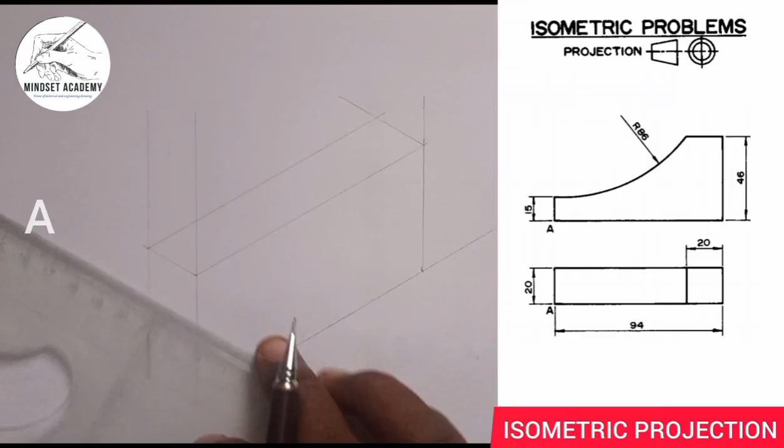You're welcome to my channel, Mindset Academy, where we want to reproduce the two views that are displayed at the right hand side of the screen in isometric projection.

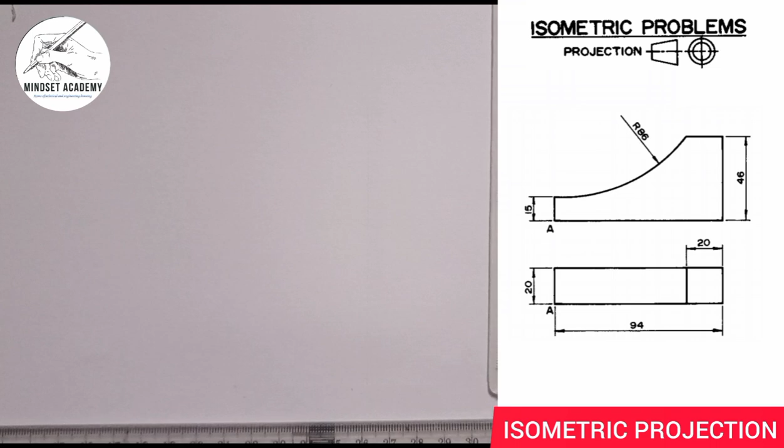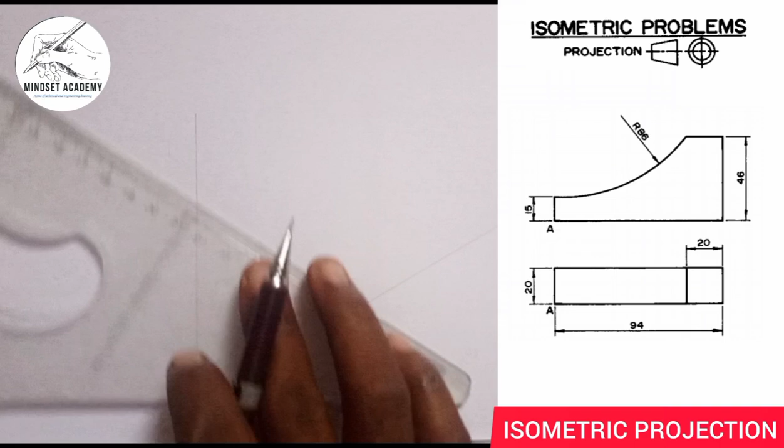When you hear the word isometric projection, the first thing you have to do is draw your isometric axis. That is, you draw the vertical axis this way, and you draw the x and z axis too this way, and also this one this way. Hope you can see that.

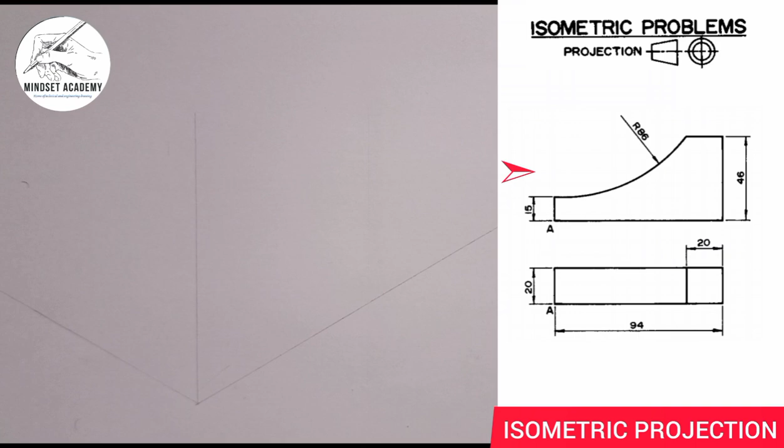Now the next thing is the entire length here is gotten from the elevation. This is the elevation. Why? Because it is in first angle projection. The entire length is given to be 94. So I am going to measure 94 from this point here. So from 0 to 94. This is 94 here.

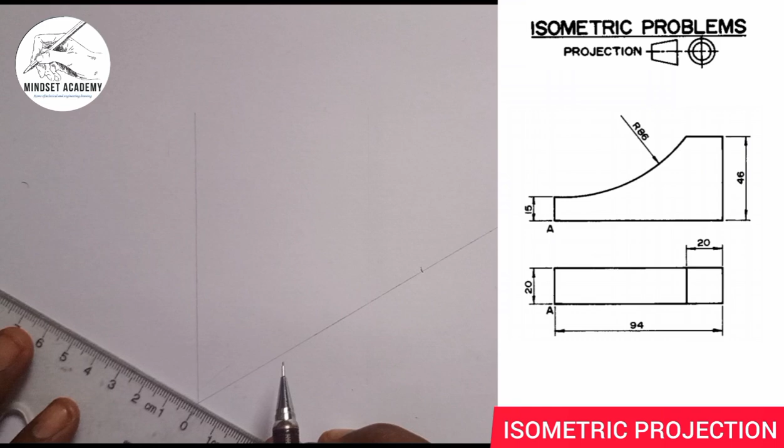Can you see that? And the width, you get the width from the plan, and that's given to be 20. So from 0 to 20. And the height is given to be 46. From here to here, I'm going to measure 46. From 0, this is 40, 46 is here.

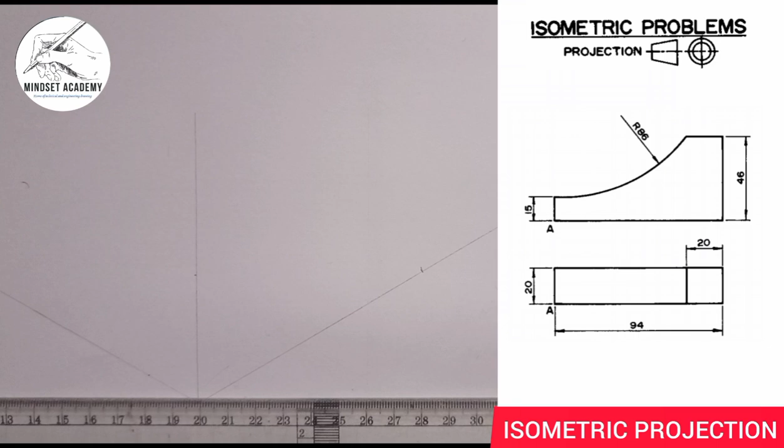Then I'm going to project them up to get what I want. So you take here up this way. Here you come here too. You take it up this way. And you close it up from here. Also, you close it up from here, and from here. Also, you close it up from here too. Now you can see what I have brought out.

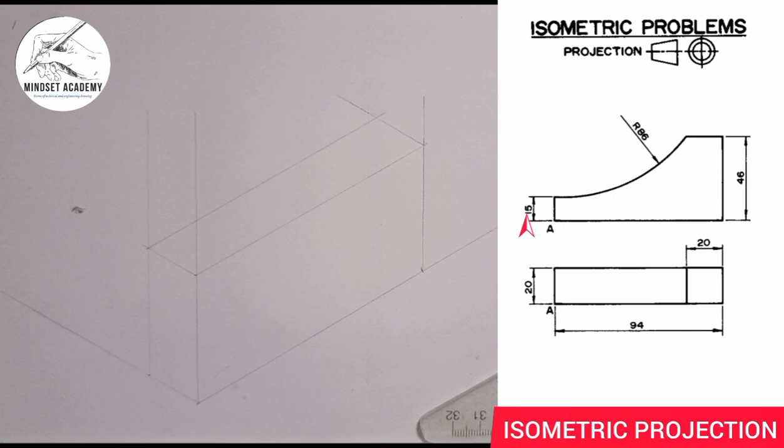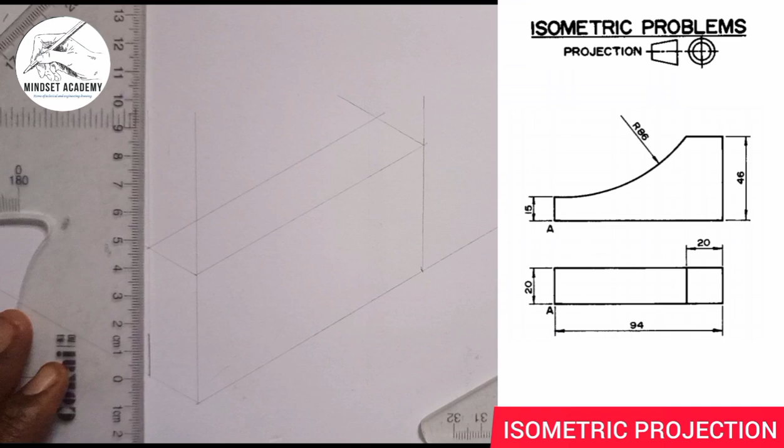Now the height here, thickness from here to here, that is point A. Point A is given to be 15. So I'm going to measure 15 from here, from 0, which I am going to thicken. From 0 to 15 at this point here. Is that taken? So I'm going to measure 15, 0 to 15. So I'll thicken it. I'll also come here too. I'll thicken here too. Right.

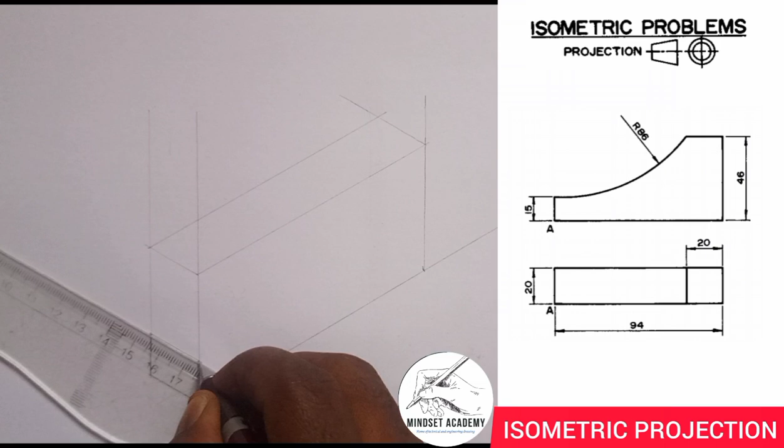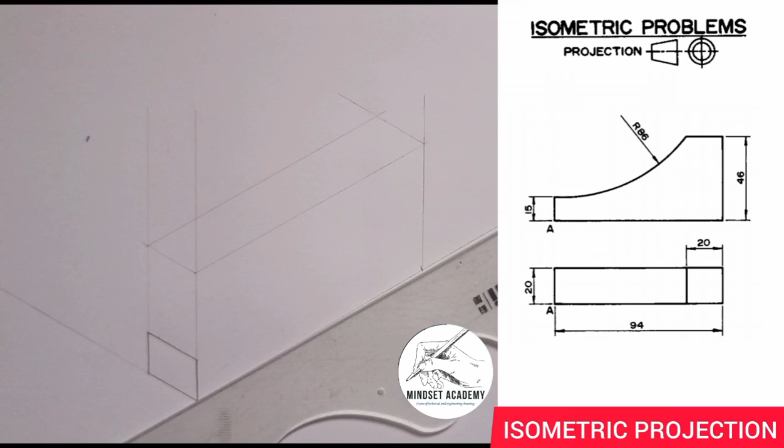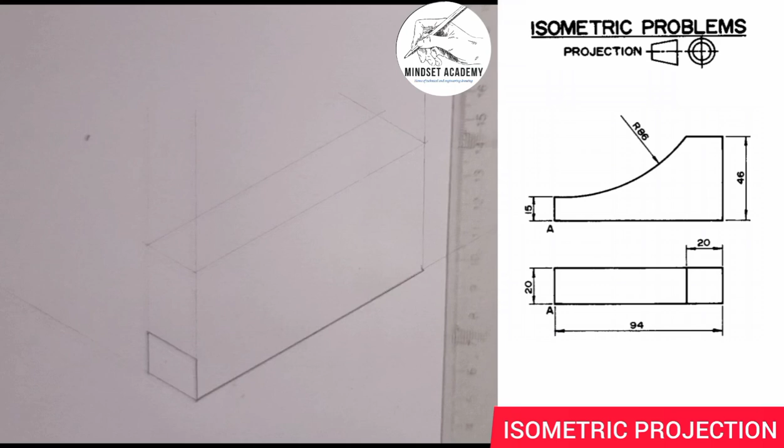Also I'll thicken here too. Also I'll thicken here too. Hope you can see that. And I'll thicken here too, from this point to this point. Right. And also I'll thicken from here to this point.

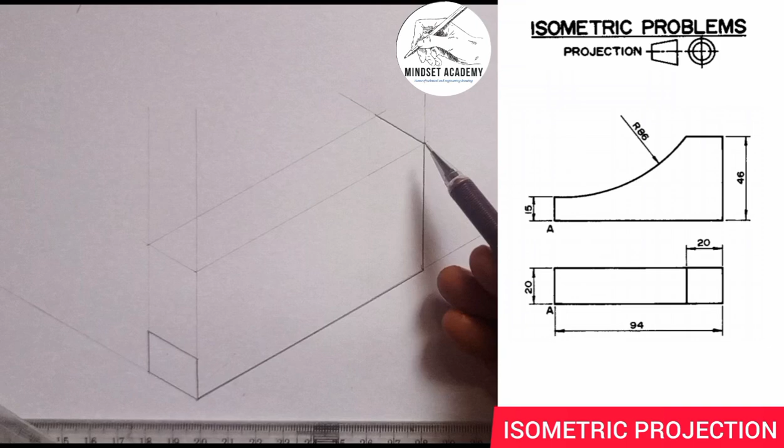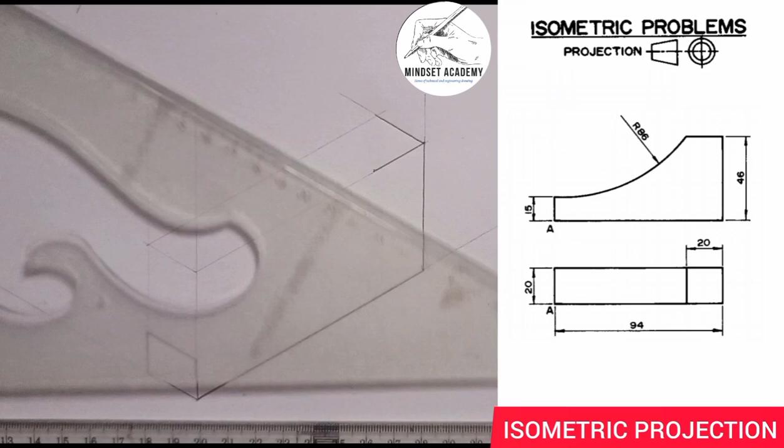Also, I'm going to thicken from this point to this point. Right? From here to here is 20, meaning I'll measure 20 at this point here. So let me measure that 20 from 0 to 20, so I can easily thicken it just to save us time here. And I'll come here too. I'll do the same thing here too. I'll come here too. I'll do the same thing here too. Now you can see that.

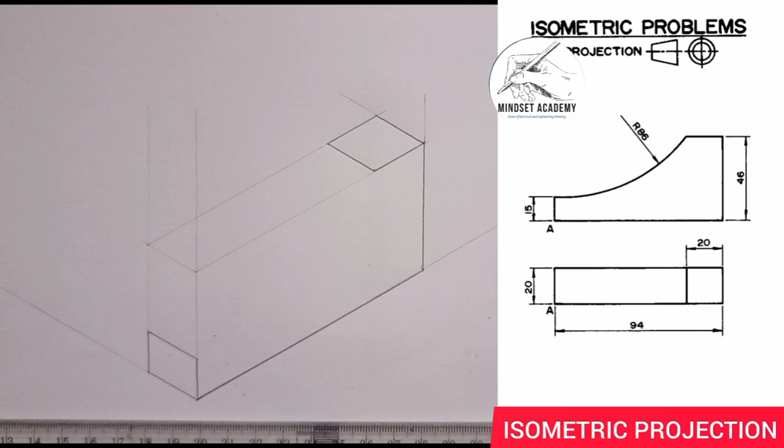Now the next thing that I am going to do here is this. There's a curve here, and the radius of the curve is given to be 86, as you can see from the screen. So what I'm going to do is reproduce the same figure that you can see, the elevation. I'm going to reproduce it here. Is that clear? So let me do that and you can see what I'm trying to do here. So at this end here, right? So let me remove that figure.

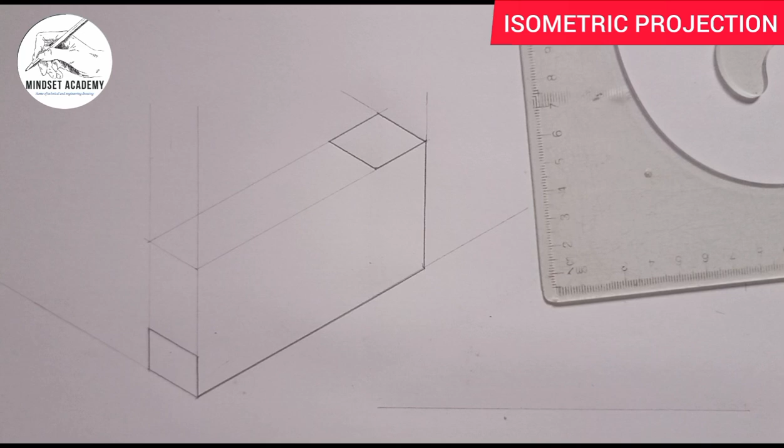So from here, I'll draw a horizontal line this way. And I'm going to measure 94, which is the same measurement from this end to this end here. That is 94. I can use my compass or I can just use my meter rule here and measure 94 from here. So from 0, can you see that? This is 94 here. I'm starting from here. Then I'll take it up this way.

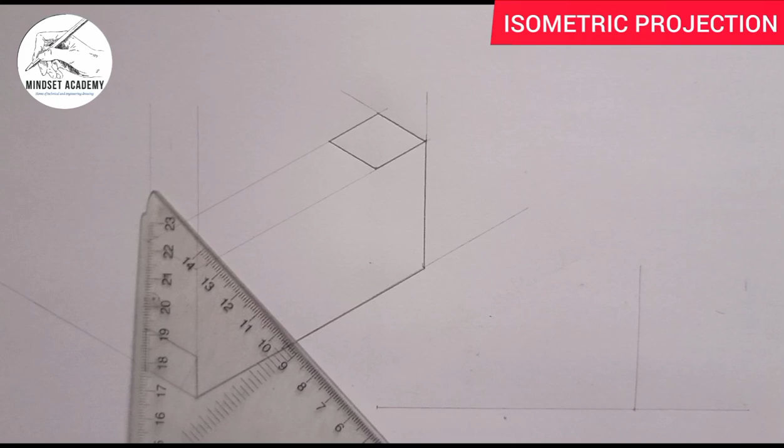And the height given there is 46. So I'm going to measure a height of 46. Look at what I'm doing. The height of 46 from here. This is 46 here. Right? And I'm going to take it up this way. Right? Similarly, I'm going to take here this way.

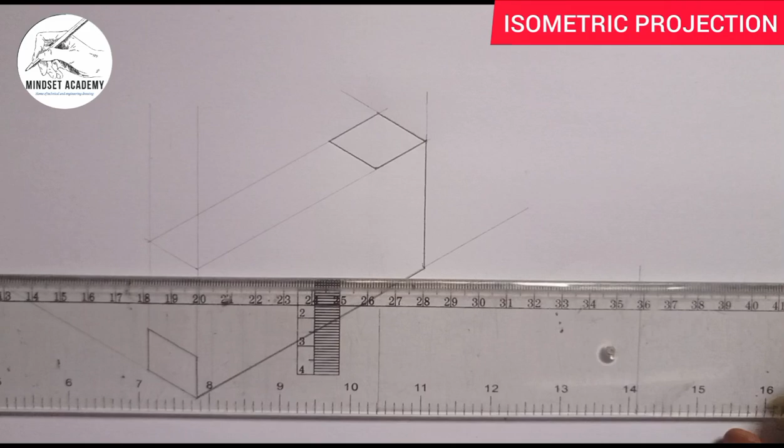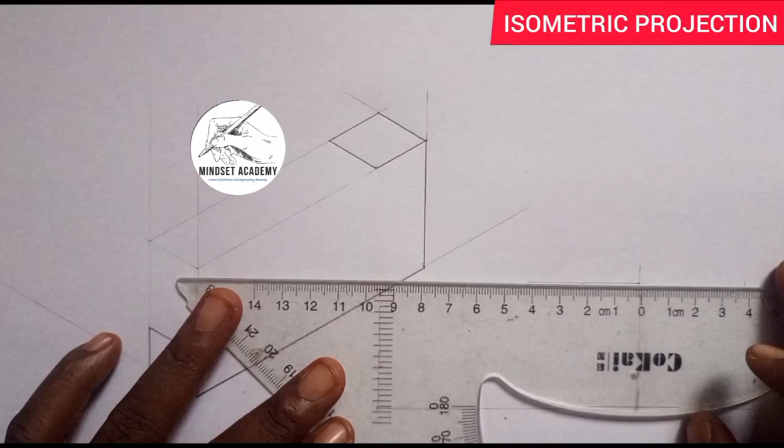So from here, I'll measure a height of 15. That's the same height here. I'll measure a height of 15 from 0 to 15. And also measure a length here of 20, as you can see. So I'll measure 20 from 0 to 20. Can you see that?

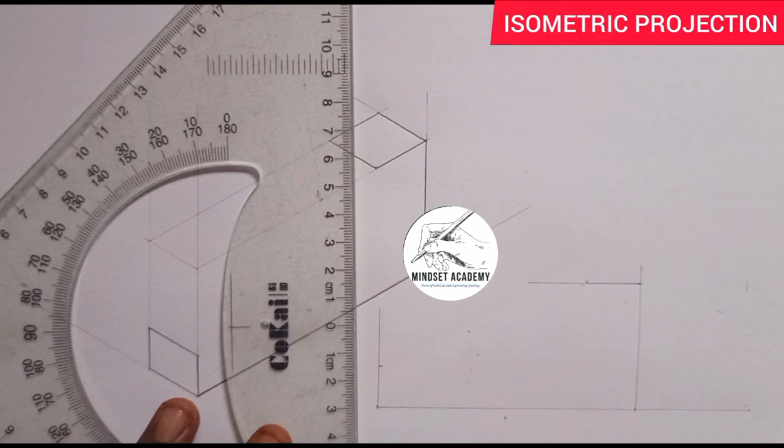Now the next thing I'm going to do is draw an arc of radius 86. As simple as this. You're going to take your compass and you measure 86. From 0 to 86 is here. And you place it at this point here. You strike an arc. You place it at this other end here. You strike another arc. Now they are meeting at this point here.

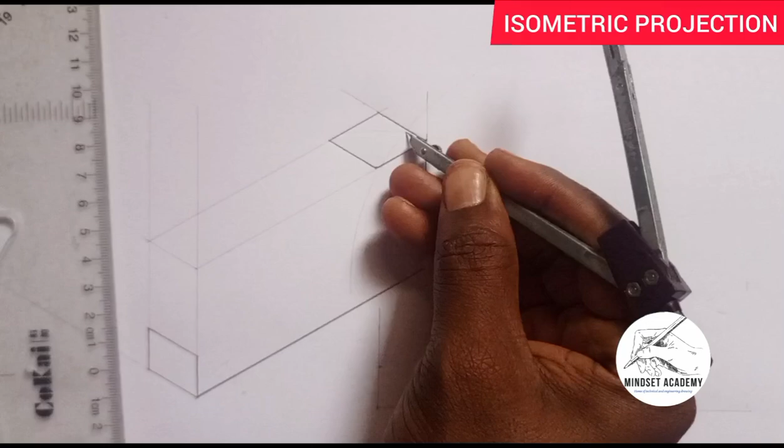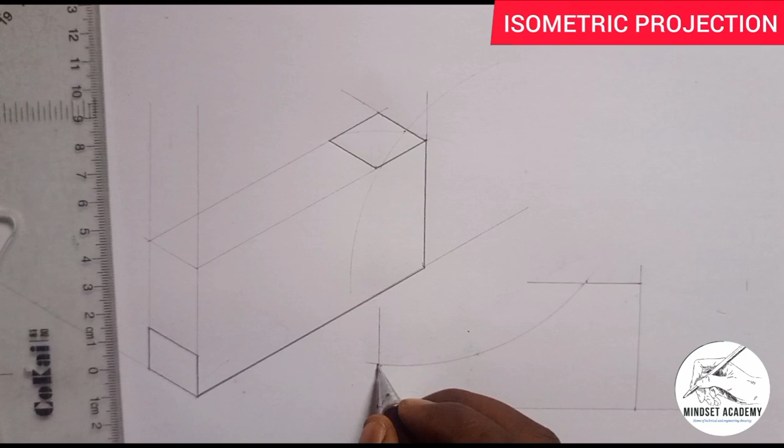Is that clear? So I'll now come here. Then I'm going to draw an arc this way. So you can see that this is what we have here, the arc, which I should be able to bring out so you see what I'm talking about. This is what we have here.

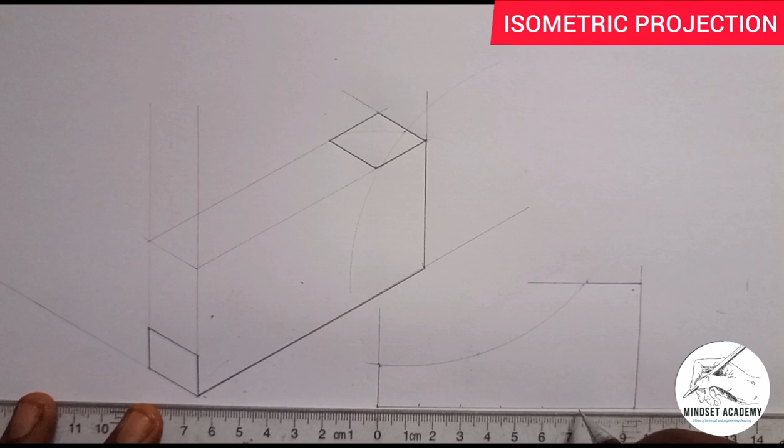That is what we have here, this arc. So what I'm going to do is this. I'm going to pick different points on this arc. Different points. Let's say from here to here, we'll say it is 96, right? See what I want to do? 96. So I can just take 3 of them. Let me take 15, right? Then another 15 plus 15, we have 30, another 15, 45, depending on you, another 15, 60, another 15, we have 75. Can you see that?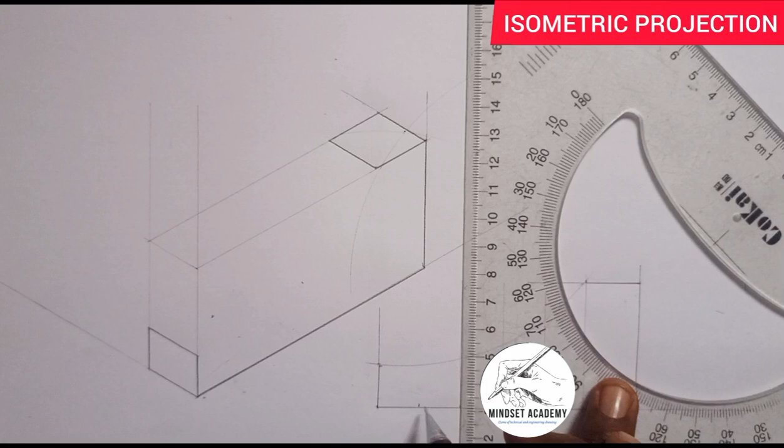And I can easily take them up this way. You see that it is meeting this point here. See what I'm doing? Now after I've done that, similarly from this point where it meets those points here, I'll come here, I'll take it down here. See what I'm doing? Come to this point too, I'll take it down here. You can see that? So see the logic here now.

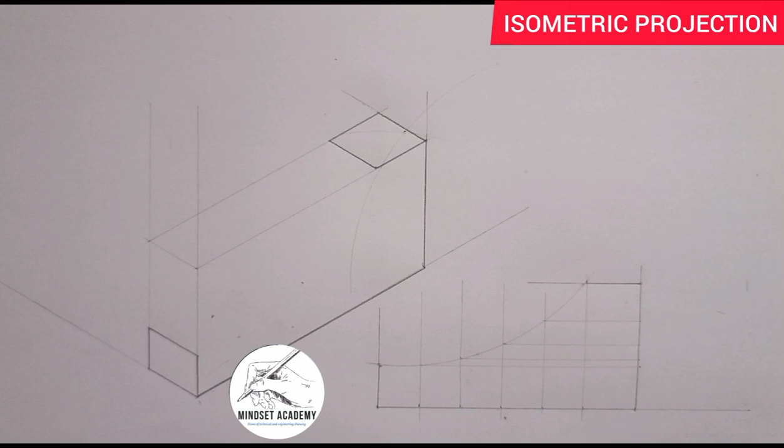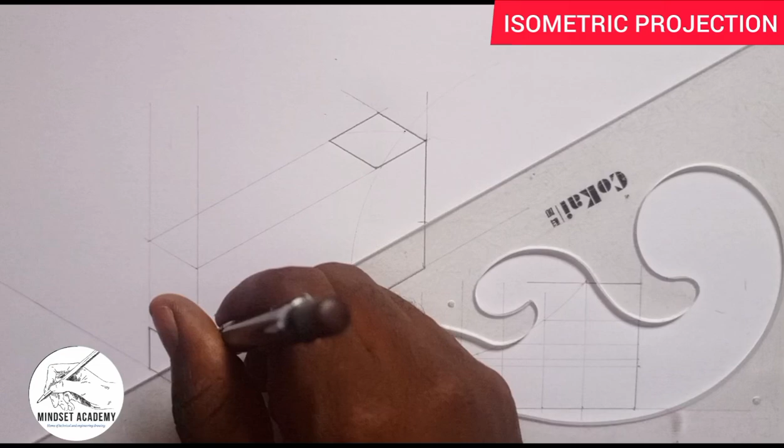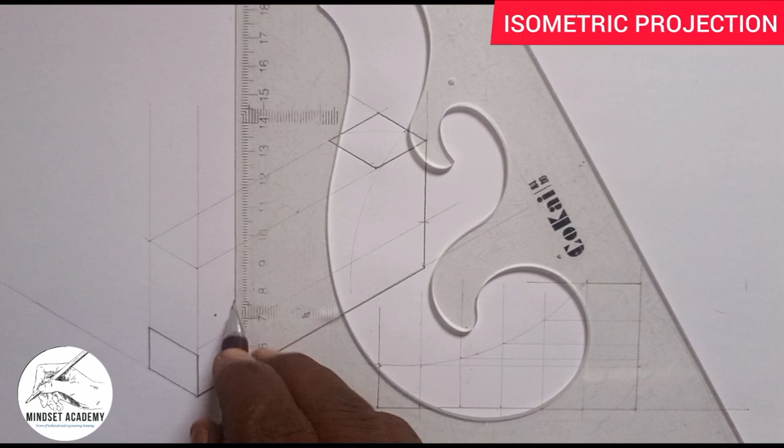I'm going to move the first point from this point to this point. I'll come here, I'll mark. Then I'm going to project my point, faint line, this way. Project the point this way. You can see that at the first point. Then from this point here to this point, you can see that I'll come here, and I'll mark. So I'll take it up from here. So where they meet, they're meeting here. So that is my point 1.

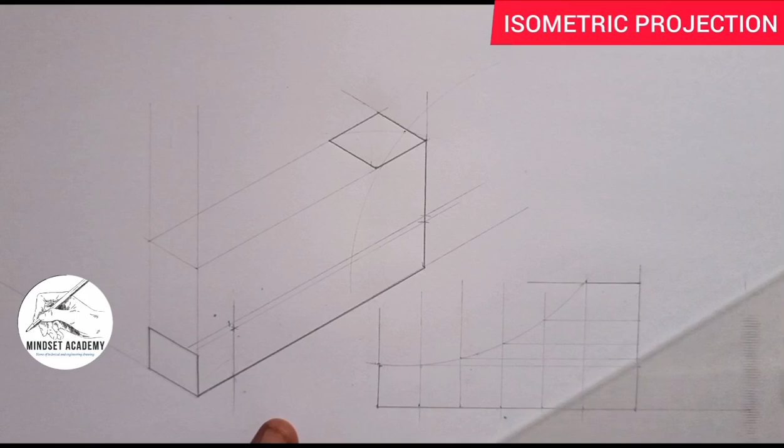I'll come again. I'll do the next thing. From here to the next point. I'll come to the next point from here. I'll mark. Take my meter rule. I'll project this. Can you see that? Then I'm going to the next point from here to here. Come here. And I'll mark. So I'll take it up to meet that point. So this is where they are meeting. That's my point 2.

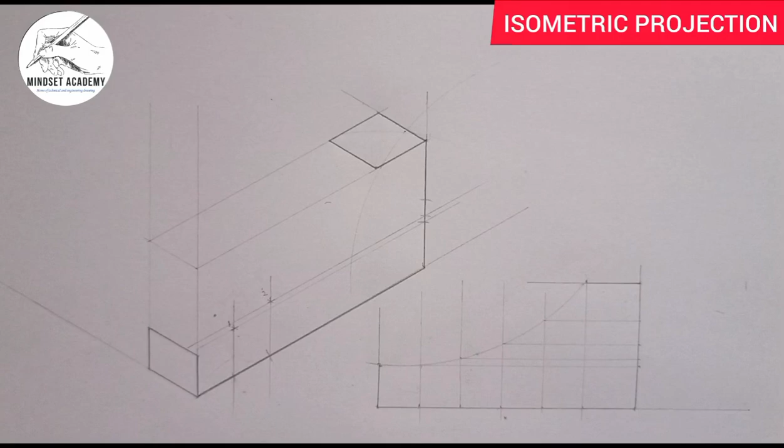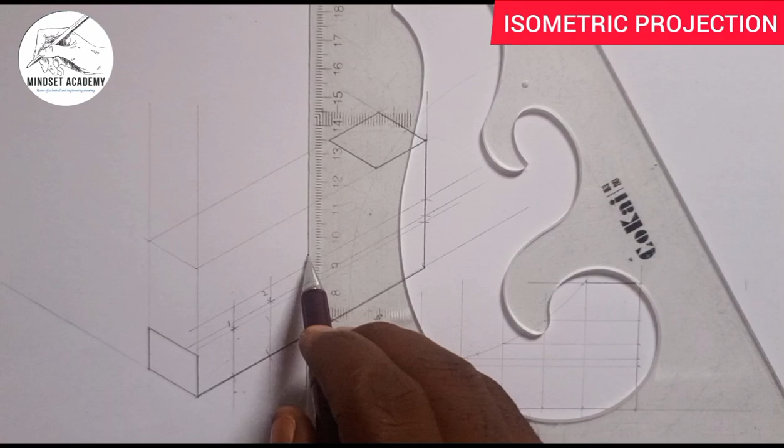I will come again from this point to this next point here. Can you see that? I'll come here and I'll mark. That is my 3. Come here and I'll do the same thing. Right? And I'll go to the third point from here to here. Then I'll come here and I'll mark. That is our point 3. So they are meeting here.

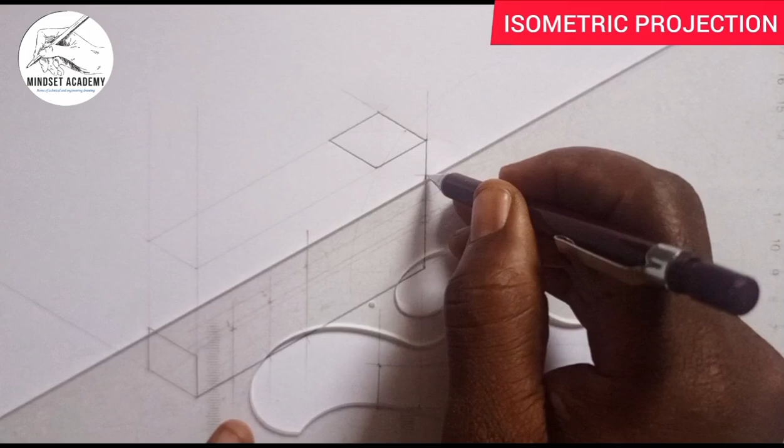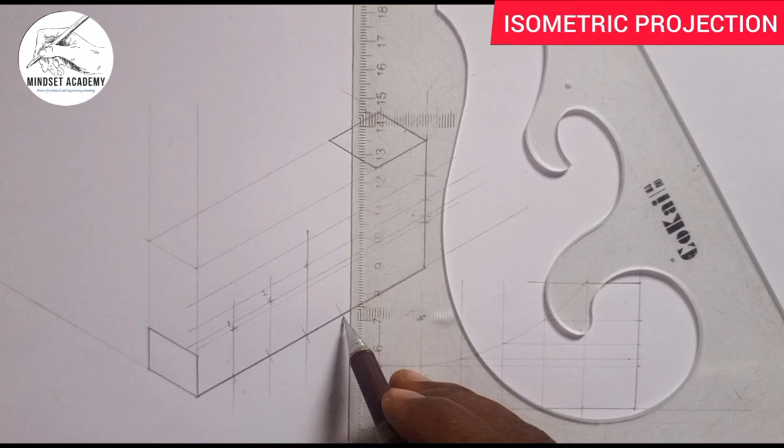Then I'll come again to the fourth one from here to here. I'll come here, I'll mark. Then I'll take it to this point. Right, that is the point 3. So I'll come here to that point also here. This is 0, 1, 2, 3, 0, 1, 2, 3, so here. I'll come here, I'll mark. And I'll take it up. So this is where they meet. Can you see that? Then I'll now take my French curve and I'll join those points to this point here. See what I want to do.

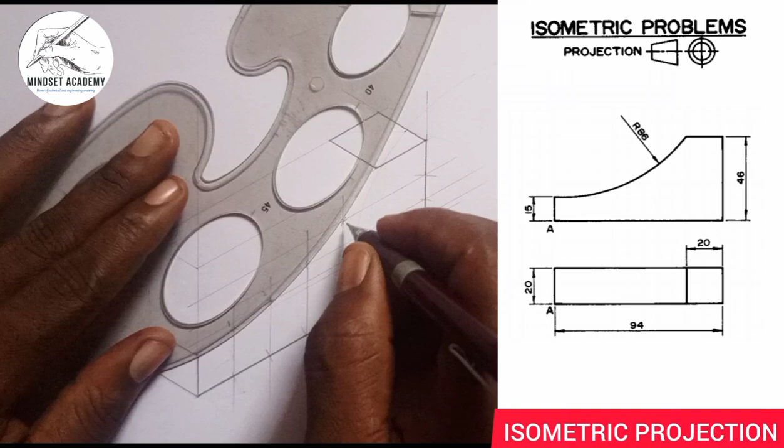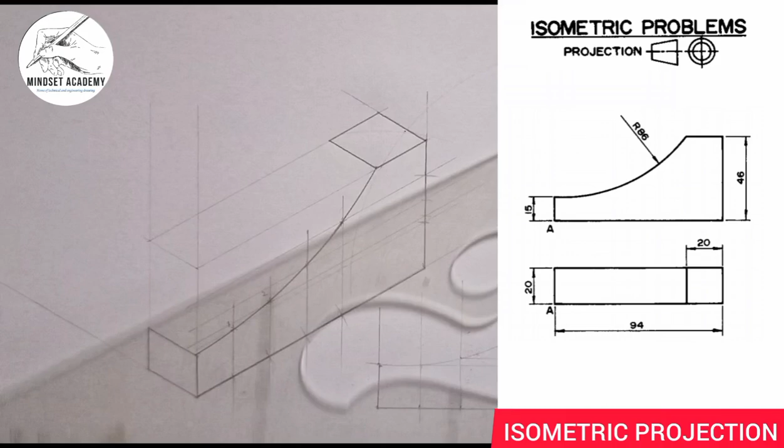Alright, then I'll do the same thing for the other side also. So what I will just simply do here is this. I'm going to do the same thing. I can just project this line here, and also project this line here, right? Then I'll bring here down from here. Can you see that? So what I'll just do is I'll transfer those points. If I take the first one, it's touching here, and I'll take it up from that point. Then this point is for this.

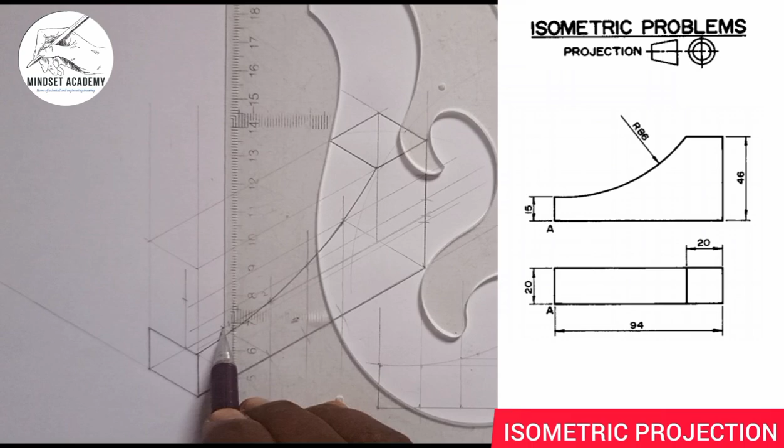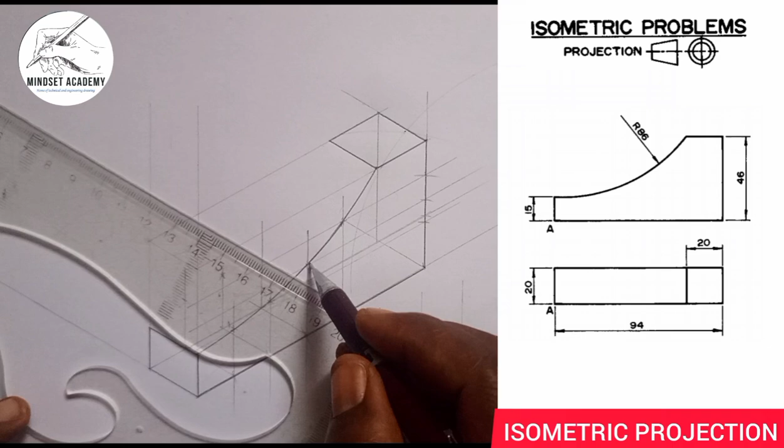The next one from here, I'll take it here to touch here, and I'll take it up. Then the next point is this, meeting it here. Then I'll come to the next point here also. I'll take it to this point, and I'll take it up. And transfer the point from here to this point. Right? Then here also, touch here, I'll take it up. Can you see that? Then I'll transfer the point from here to meet this point here.

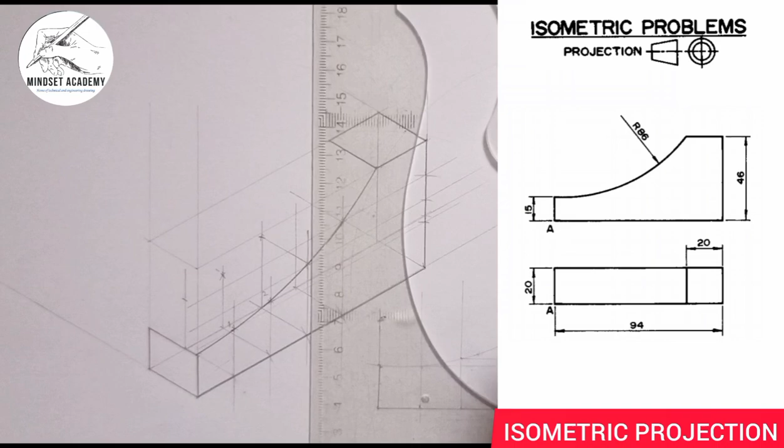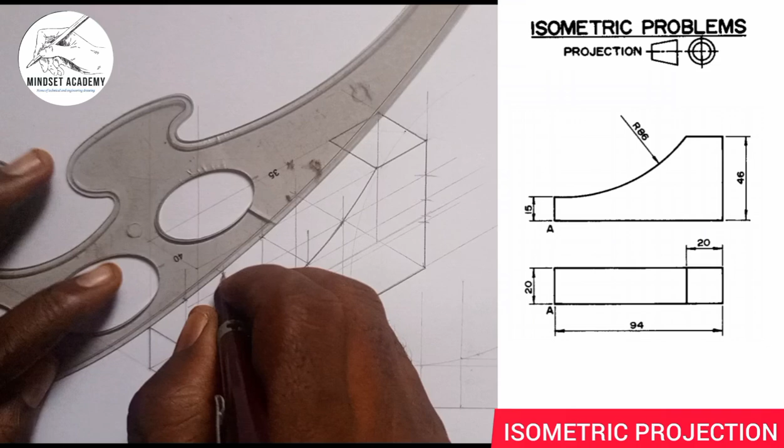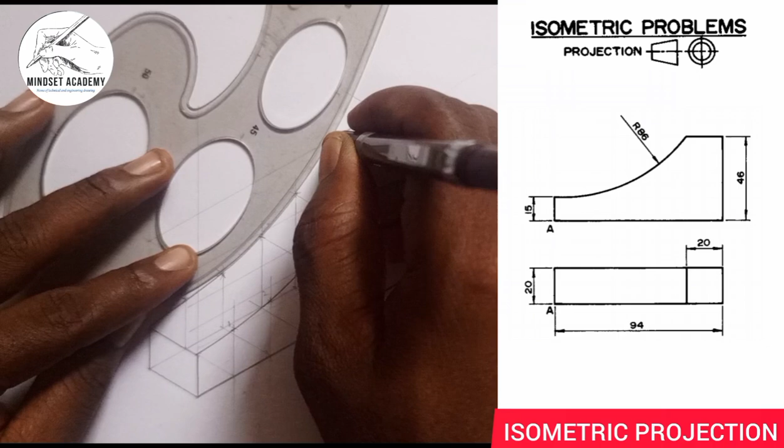It's meeting here. So I'm going to use my French curve, and I'll connect all these points together from here. Just connect it on this point. Yes. Can you see that? So this is what we have here. And you can see at the right hand side of the screen. That again, so we produce them.